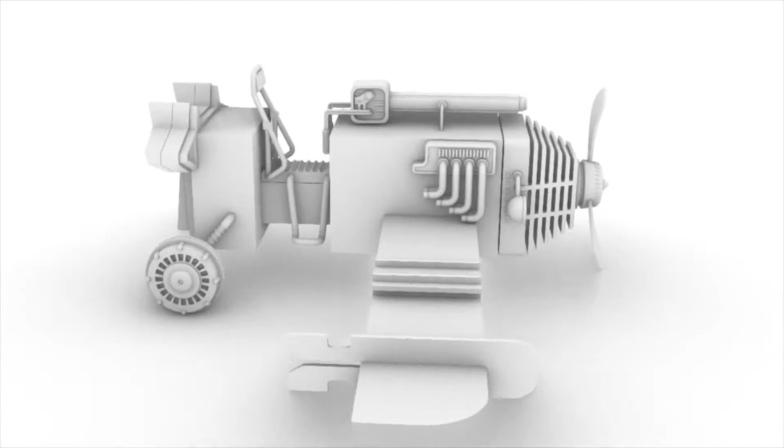Hello everyone, I'm Shan. I'm doing a toy airplane design. In the last step, I finished the rough modeling and now I'm going to the details. In my design, this airplane is composed of laser cutting parts and 3D printing parts, which are the main structure and accessories of the airplane.

I start with researching. I wish my design could display the 3D printing in different structures and details, so I was seeking Gundam design as an inspiration.

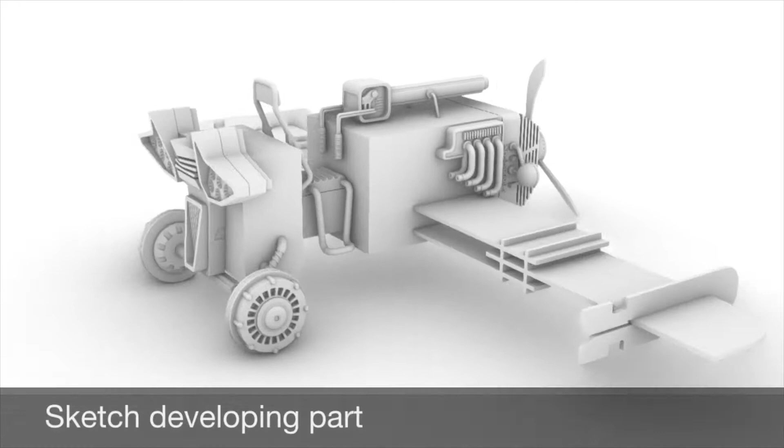After referring to the design language of Gundam, I continued improving my design by sketching. As you can see, there are 11 spare parts in the final design version. Then I focused on improving their details one by one. It is obvious that when there are many details in your model, the smaller the size it has, the more details it will lose. Therefore, when I was sketching, I paid a lot of attention to the visibility and scale of these spare parts.

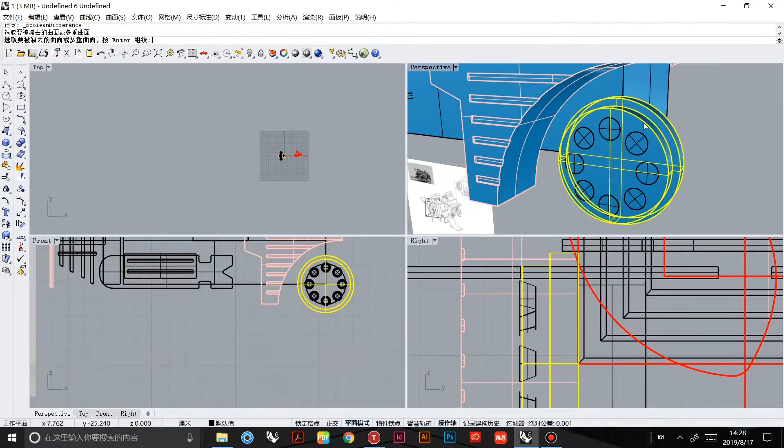Then I move to the modeling step. As usual, I use Rhino for modeling development. There were 11 spare parts I needed to model. This is a huge work and it approximately took 2 days to finish. Therefore, I just show a part of the modeling process here.

This is the 3D effect when I finished the spare parts design.

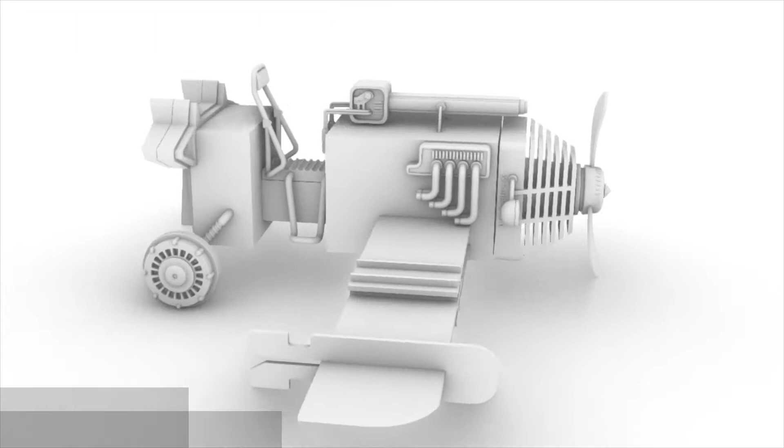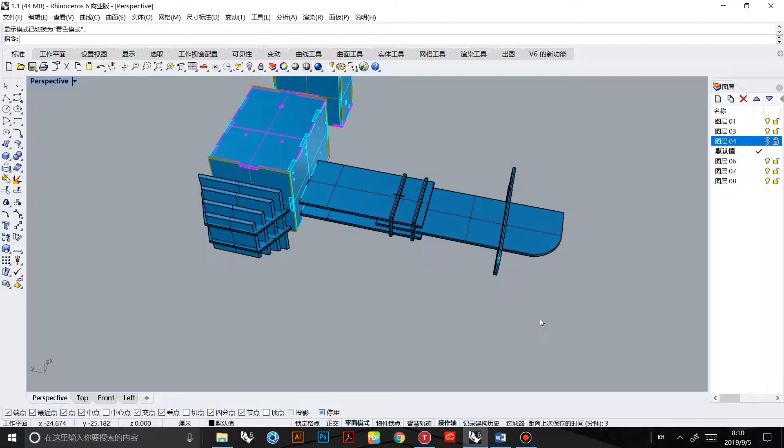In the next step, I started with calculating the board size of the main structure. The thickness of each extruded surface is 3mm. In this case, I could use 3mm MDF and acrylic from Almighty Workshop store. Before laser cutting, I had to check if these boards fit to each other. If everything is perfect, then I could export the Illustrator file and cut it in Building 100.

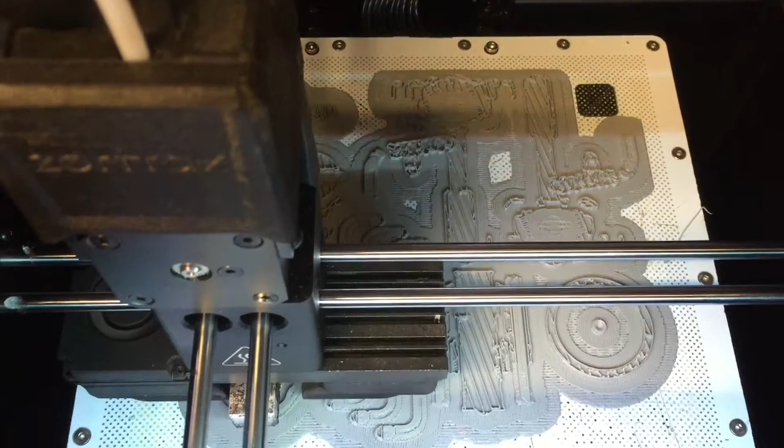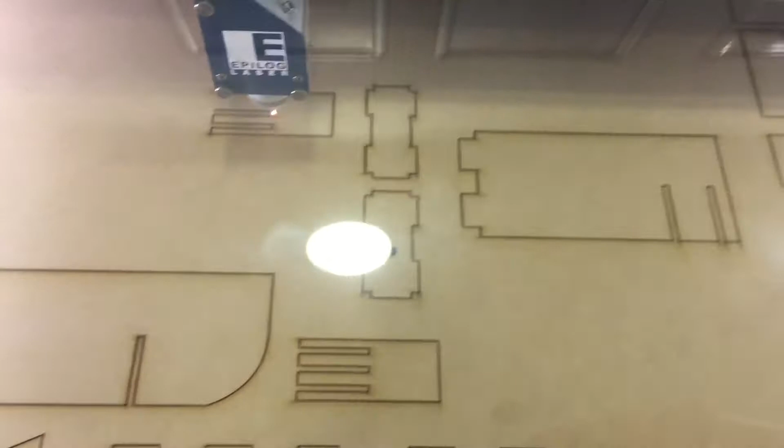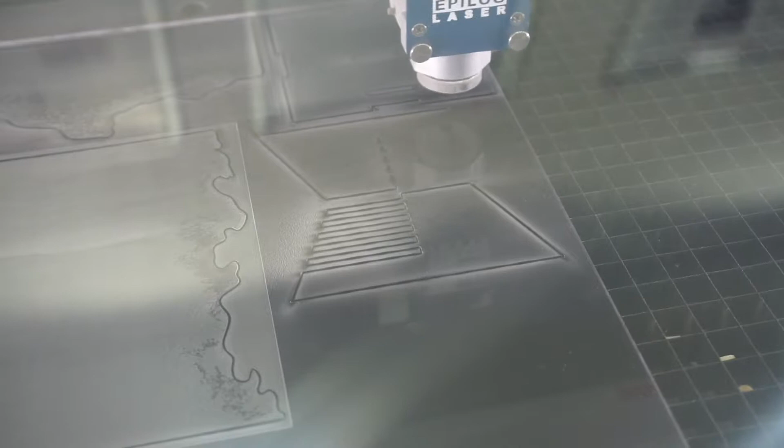Then I moved to the laser cutting and 3D printing process. To be honest, I'm not really satisfied with the outcome of the 3D printing effect. The first problem is that I didn't calculate the right tolerance of the joints, leading spare parts to not fit to each other. In order to display the final effect in class, I had to stick the accessories and the laser part together using tape. Secondly, when 3D printing, uneven heating leads the model to shrink, so I needed to reprint some of them.

I interviewed technical staff Tim, who explained why this shrinking happens in this video.

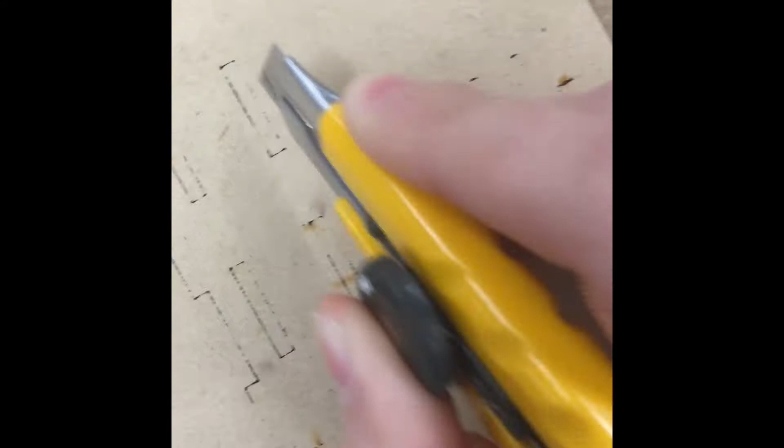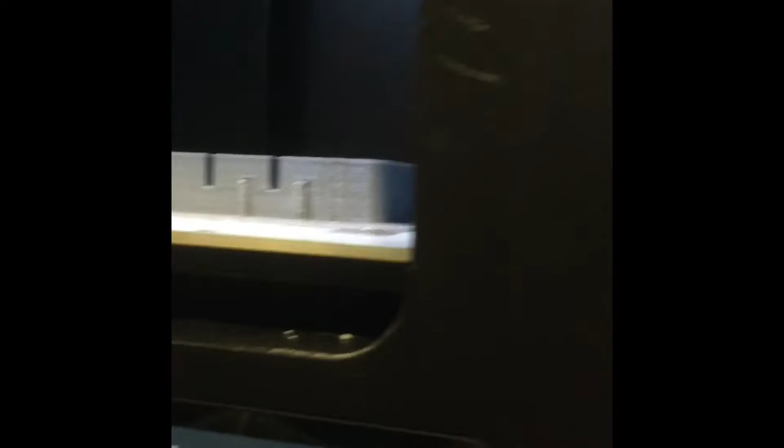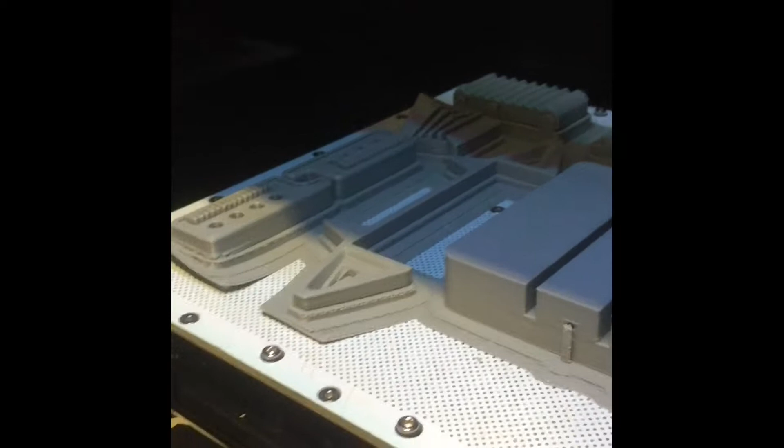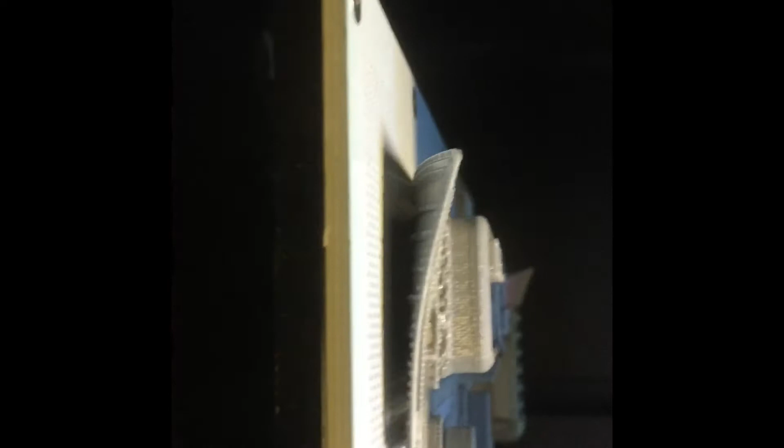What happens is if that part of the model is a different temperature to that part of the model, it starts to contract and shrinks. That happens when the model has a non-uniform temperature to it, and it starts to contract and literally curls up off the bed. You can see it's actually pretty far back where it's come off. So what we might have to do is—the rest of the parts seem fine. This has come up a little bit, but it's fine. I think it's only the raft which has been affected; the actual part you might have to check. Is it supposed to be flat on the bottom of that? Yeah, because it doesn't look flat.